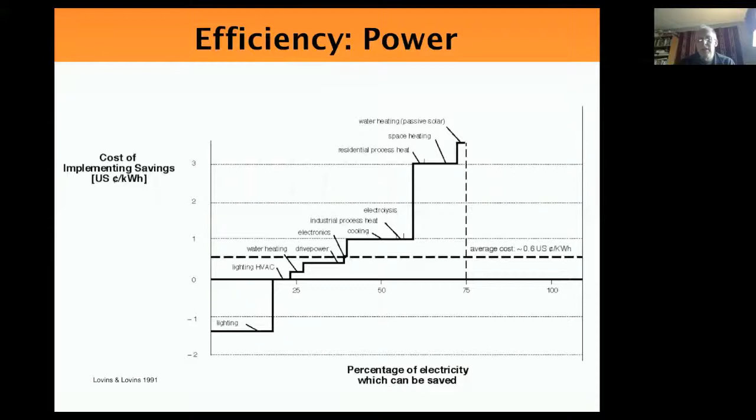This graph shows a cost curve of the various energy potential savings for electricity, with the average cost in many cases being far lower than the cost of grid-supplied electricity. In fact, the Rocky Mountain Institute in Colorado is probably the world leader in efficiency thinking — it's an efficiency think-and-do tank, as they call themselves.

An interesting thing for Alberta: 80% of our carbon emissions are actually based on energy. So that is definitely the point where you want to start. It's not the only one, but the most important one.

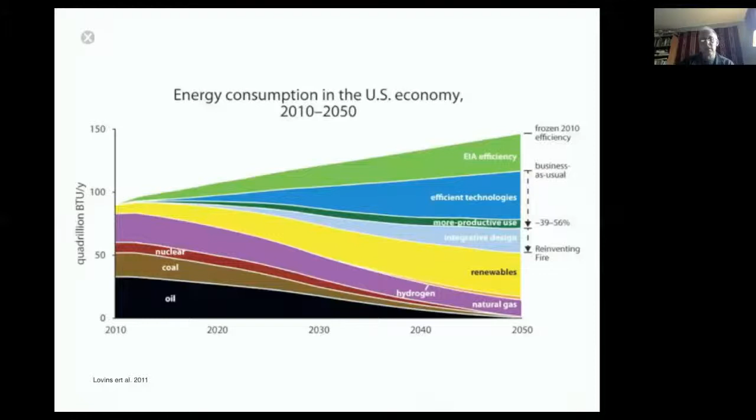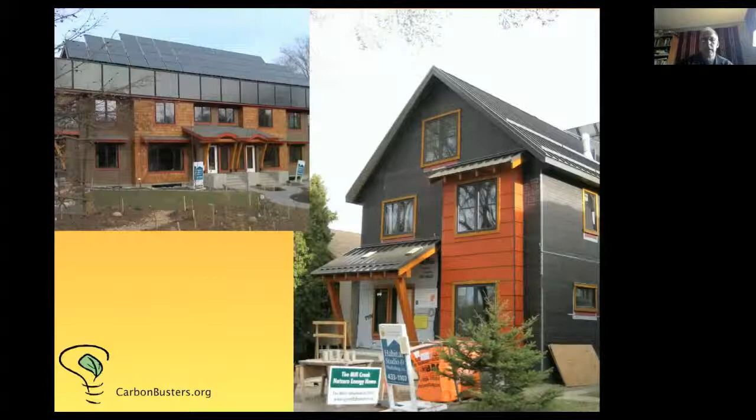For example, many of these windows have integrated solar, but what's more important is that these are high-performance windows built at the time by Visionwall, a former company in Edmonton. These windows have an R value of R7, compared to about R2 for a typical double-pane window, so it's about 3 times as good.

The cost of these windows was about $300,000 extra, raising the cost of the window systems from $2.8 million to $3.1 million. But because they are more than 3 times as efficient as a regular building, the designers could also downsize the mechanical system, which went down in cost by $800,000. So you have a building that not only costs less money to build, but also has 3 times lower heat losses in the winter, and is 3 times easier to cool in the summer.

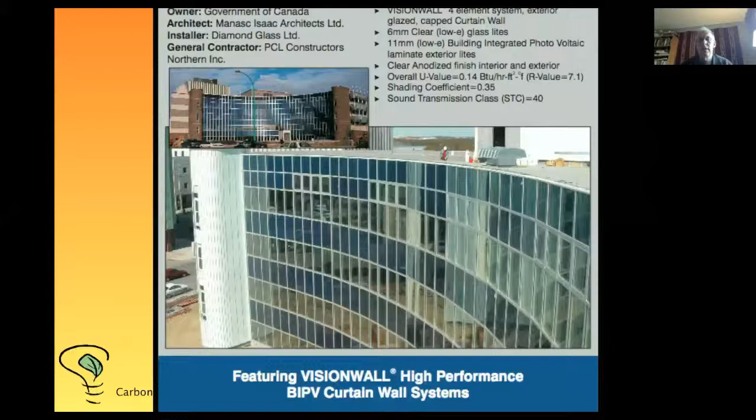In the residential field, it's a lot harder to hide the extra costs of your green systems, because all you have is a roughly $7,000 furnace, and that's also the hot water tank, I guess, but it's not a very high cost. In the commercial field, the mechanical systems tend to be a lot more expensive, and there it's a lot easier to offset the green costs with other capital costs for mechanical systems.

Another thing that we are excited about is the rise of something called the passive house. Passive house is a design standard developed in Sweden and Germany that allows you to cut the consumption of a house by about 90%. This is achieved by basically looking primarily at the building envelope.

You can later add photovoltaic systems and all kinds of extra embellishments, but the interesting thing is that once you build a house, it is very hard to change the building envelope. For example, if you have a lot of air leakage, which is still the case in most new buildings, they have very high losses from that. If you have poor walls and windows, those are relatively costly to retrofit, but a lot cheaper to implement in the design phase.

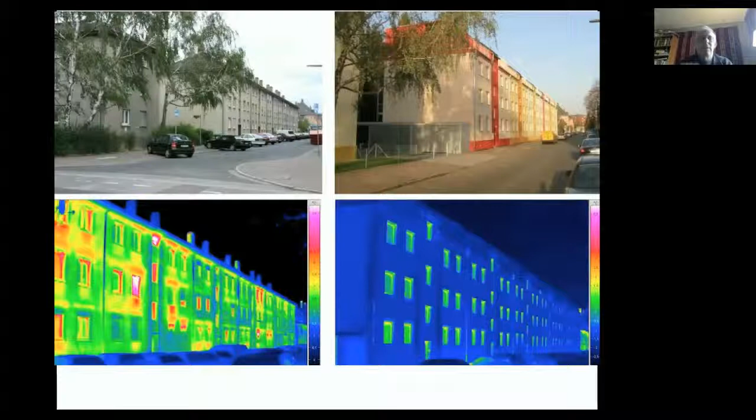Huge difference. On the right-hand side at the bottom, you can see the picture after the retrofit, and the building has an amazing building envelope. The windows have been vastly improved, and even though they have the highest heat loss, most of the windows have less heat loss than you had before just from the walls.

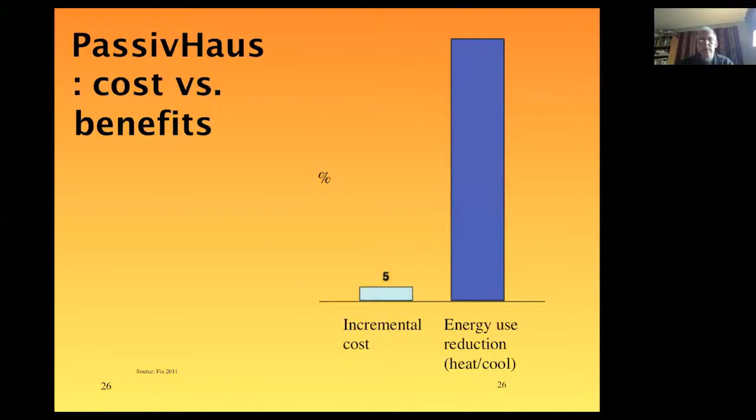Energy savings, of course, are not the only benefits of green buildings. Many green buildings have very good lighting because they typically have large south-facing windows, and the benefit from lighting is that we tend to perform better. One study in North Carolina found that students in a sunlit building, as opposed to a room with only artificial lighting, did 14% better in their grades over the course of the year. During high-stress situations, such as an exam, the performance was actually 21% better, even better than during normal operations.

Another interesting technology is using parabolic mirrors and optical fibers to deliver free lighting into your building. This is a model designed by Sunlight Direct, an offshoot of Oak Ridge National Laboratory. They're basically using a parabolic mirror, about a meter or 3 to 4 feet in diameter, which bundles all the light up in this dome and sends it down through about 120 optical fibers. These fibers then carry the light into workspaces. It turns out this small mirror has enough light to supply about 64 workstations with adequate light.

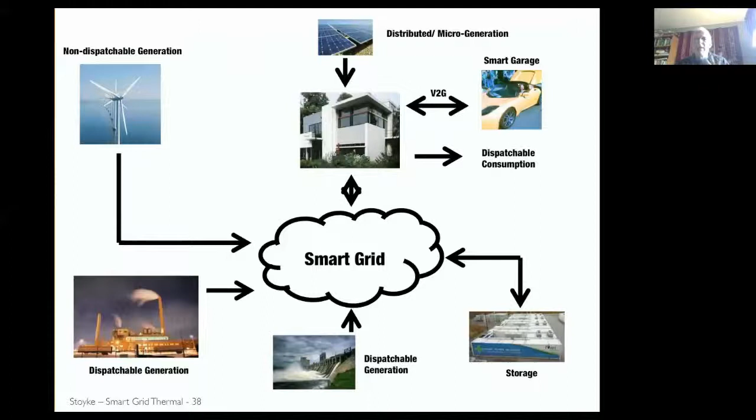Finally, every year Shell hosts a marathon where students build a super efficient car. It's basically like a tricycle with a sleek body and a very small engine. These students have managed to build a design that gets 10,000 miles per gallon. It would take about 1 liter to get to Toronto, albeit not at a high speed—top speed is about 40 kilometers an hour. The cost of driving around the globe once, if you could drive around the equator, which of course isn't possible, would be about $7, which is pretty amazing.

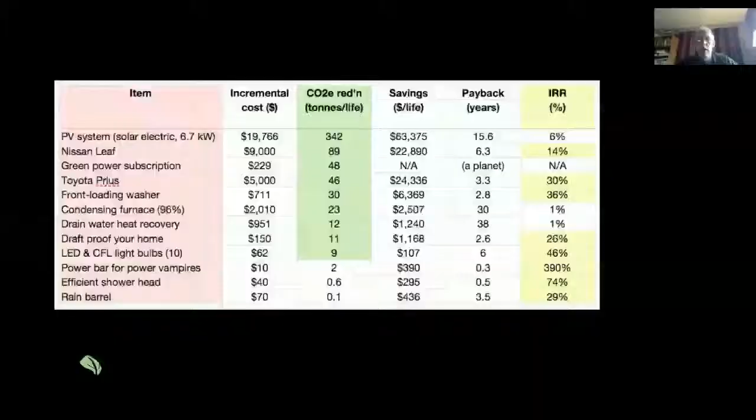I'm going to skip this one for now.

Next, I'd like to talk about integration. Right now, if you think about a building, we are basically lone warriors—we have our own furnace that burns mostly natural gas in Alberta, producing gases in the process. We also produce our own hot water, for example. But the problem is that this process isn't super efficient, because the byproducts we give off, in this case a lot of heat, are basically lost.

In the city of Stockholm, Sweden, in 1990, the city had a fairly large area that used to be an industrial site, and they decided to make it into a residential area. First, they had to remove about 100,000 tons of mildly toxic waste. Then the city decided that anybody who wants to build in this site, called Hammarby Sjöstad, has to meet very high performance standards for the environment—50% reduction in any impact: 50% less energy, 50% less water, 50% less VOCs (volatile organic compounds) given off by paint from the buildings.

And the key to achieving this was integration. This target sounds pretty good, but they're saying they could actually do a lot more today, because this was already 25 years ago when they started this process.

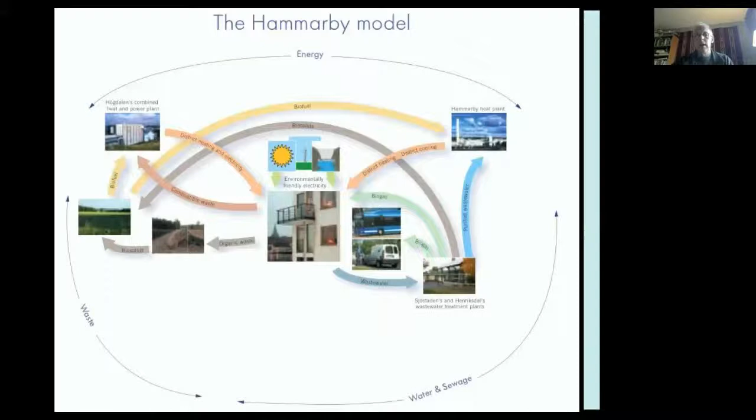They basically applied this model to the whole system, saying let's take any of the waste streams and turn them into a feedstock for the next step in the industrial process or in the integrated municipal process. This is the total, all the total flows.

Another example you might have heard in the context of Blatchford is they actually have a vacuum system underground that collects all the different waste streams, and the computer basically sorts it or designates which of these bins is emptying out, and transports the waste at 70 kilometers an hour underground, basically eliminating the need for smelly and noisy trucks to come around and collect the waste.

So what was the cost of this system? There's actually zero cost for the city itself. These are the development standards for this development, and if you don't meet them, you cannot build here. It turns out the incremental cost of implementing all these changes was only about 5% of the capital cost, so not very high.

But what was interesting is that so many people liked the concept of having an energy efficient home, of having a design that is transit oriented, with integration of LRT. You have all the basic needs in your neighborhood - for example, there's a hairstylist, there are grocery stores. Many of the basic amenities and services you want on a daily basis are in walking distance.

They found that developers could actually sell these properties for 25% more than properties in surrounding areas that didn't have this kind of development. So it's basically a win-win-win scenario.

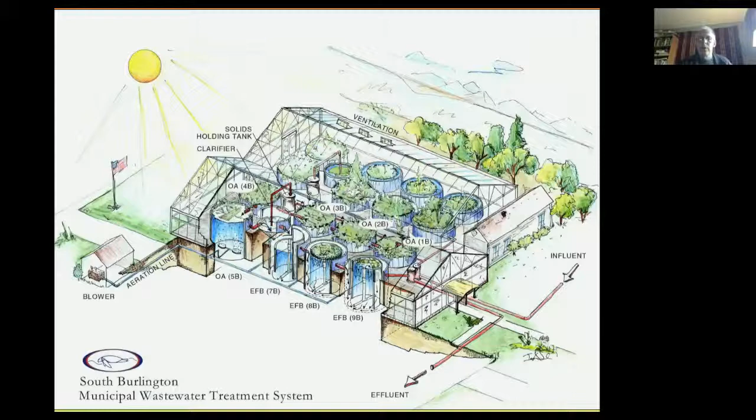So basically, this is the sewage plant - looks a lot more attractive than many other sewage plants. It has a number of stages: a biological bacterial tank, an algal tank, and then a polishing tank that uses vascular plants. This system is running right now west of Edmonton, near Drayton Valley.

The municipality is actually using this technology to clean water in the community there. One of the summaries for this technology is basically that the system is mechanically simple, but biologically very complex.

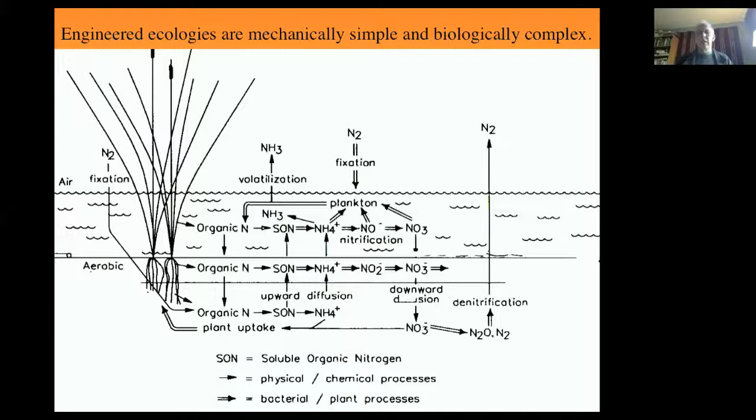It turns out that one of the systems they ran in the US, where there was an oil spill, they had both the municipal system and the smaller system in a commercial application, and they found that the biological system recovered from the oil spill in about 3 weeks, while it took the municipal system about 3 months to be up and running again. So it was fairly resilient, actually, to perturbation.

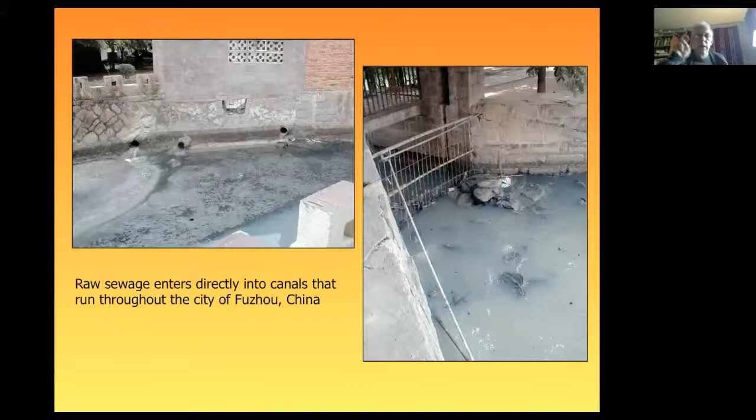In China, many of the high rises have no sewage treatment, and the water basically goes straight into a canal - that's the picture here of the sewage treatment. They planted 12 kilometers of these beautiful vascular plant systems in one area that are now basically absorbing nutrients from the waste stream and creating a much greener, more beautiful canal.

Here's another example of how innovative thinking can make a real difference in municipal planning. One of the issues, of course, is stormwater. A large part of the costs of the city arise from stormwater drainage.

For one, you don't have to water as often, or never. You also have less stormwater overflow - Edmonton and Calgary experience overflows of stormwater every year, which isn't really good for the sewage system. In this case, you avoid that, and you also have lower costs for keeping the plants alive. So again, it's a win-win. It just takes a very small design change.

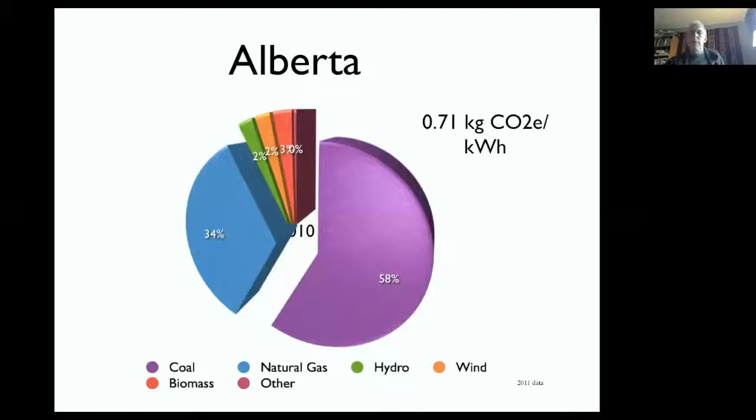Let's get just a few more points about where Alberta is heading. Right now, this graph shows the recent carbon emissions from electricity, a lot of which comes from coal. So we've joined a group called the Alberta Green Economy Network, which is basically trying to provide advice to the Alberta government on how we can grow the economy, create jobs, and also reduce our carbon emissions.

One of our proposals is an energy efficiency fund of $5 billion — that's billion with a B, not million — which would be funded out of a carbon pricing, a carbon tax. It would actually only need a small portion of that carbon tax. This step alone could create about 46,000 permanent jobs in Alberta, because retrofits are fairly labor intensive — you get around 40 jobs per $1 million invested, which is a lot more than in some other areas of the economy.

The next proposal is that we want to see a renewable grid of 20% renewables by 2020, including 800 megawatts of solar.

We are asking for a coal phase out, which is already part of the current government's election platform, because coal actually gives off as much CO2 in Alberta as all of the oil sands, at least in the production phase. So it's quite significant, and coal is definitely the most polluting source of energy we have on the planet right now. The health impacts alone amount to about $300 million in reduced health costs for Albertans and 100 deaths averted every year.